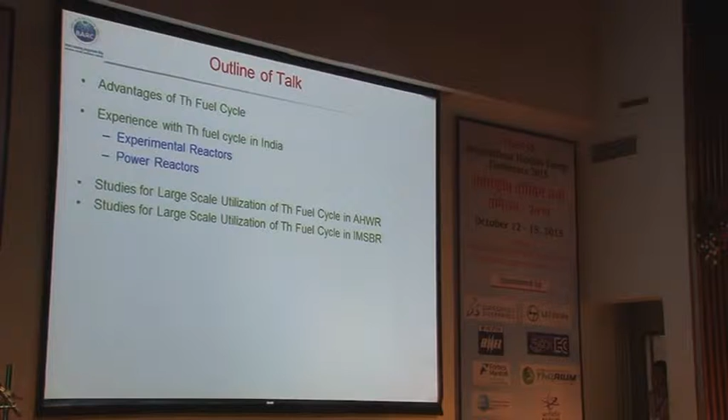I will be giving the work being done in RPDD regarding the development of advanced heavy water reactor, and some flashes of MSBR. The outline of my talk: first I will give some advantages not spoken of in this conference, then experience with thorium fuel cycle - this has been dealt by Dr. Vijayan at length, so I may skip this - and then studies for large scale utilization of thorium fuel cycle in AHWR, followed by Indian MSBR.

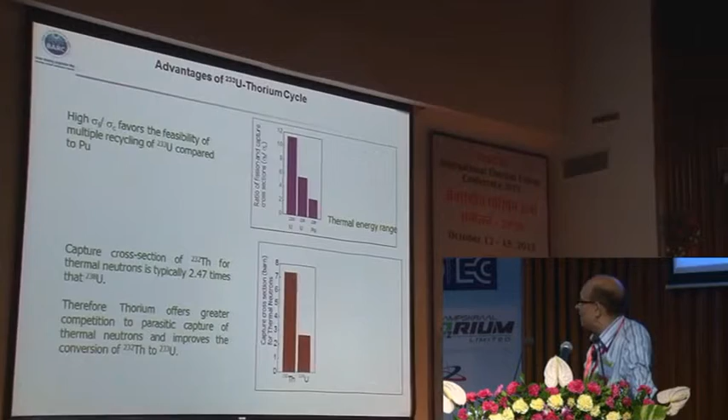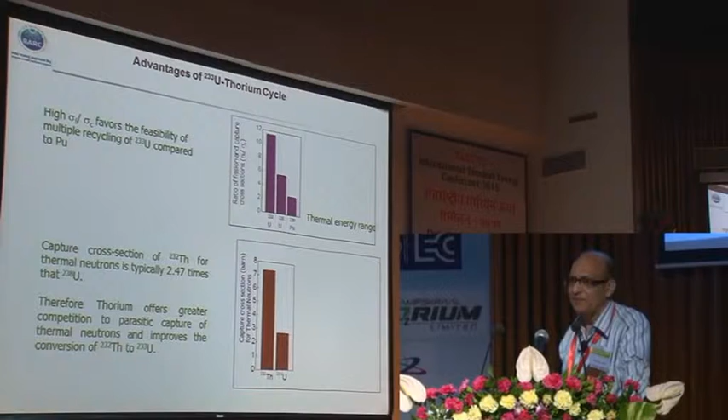As you know, one important thing is the sigma fission to sigma capture cross section of uranium-233 in the thermal energy range, which is highest for uranium-233 compared to others. That means more and more multiple recycling can be done with uranium-233. This is one of the important aspects for the development of this fuel cycle.

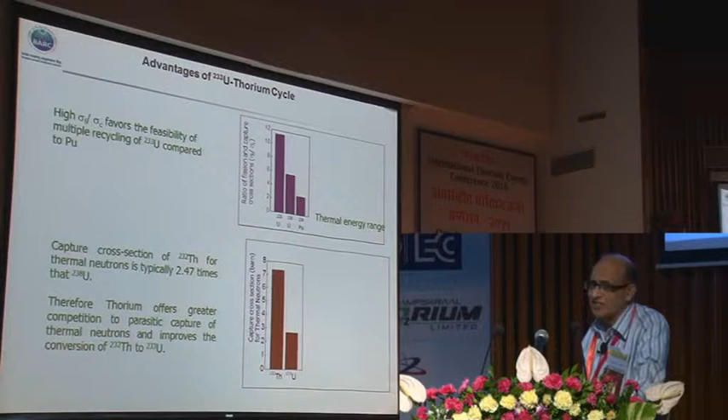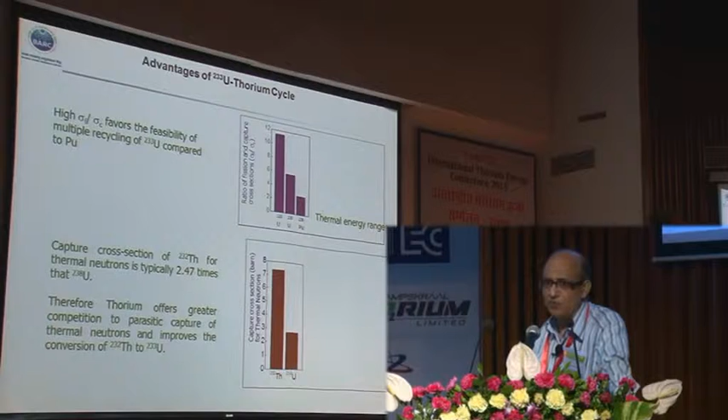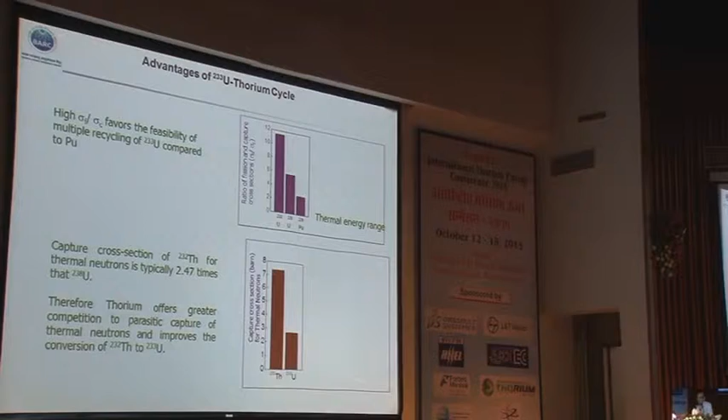Another aspect is the capture cross section of thorium is roughly 2.5 times that of uranium-238. That means in order to compensate the higher absorption in thorium, the enrichment has to be much more. Further, if you want to really take advantage of thorium cycle, the burn-up also has to be large, which further calls for higher enrichment. That means the total absorption cross-section of the thorium fuel is much more. Because of this, it offers very good competition to other structural materials - you can afford to use, say, light water as a coolant. That is why in AHWR, a light water coolant has been considered.

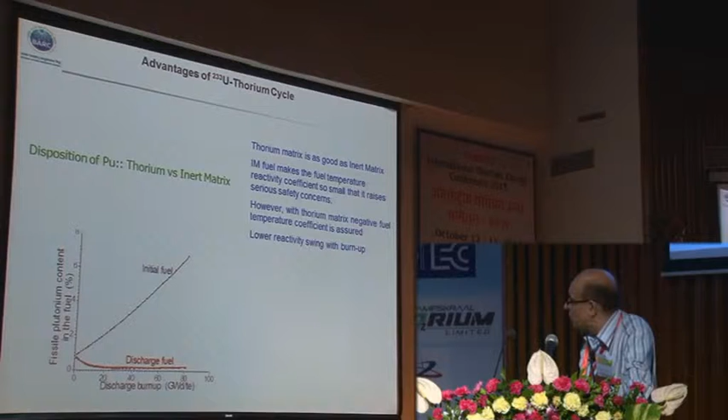Another advantage of thorium, which is of course known, is that it offers a very good material for the disposal of plutonium. It is as good as inert matrix, but one of the advantages is that the reactivity coefficients are negative with this compared to inert matrix. So this material is better than inert matrix.

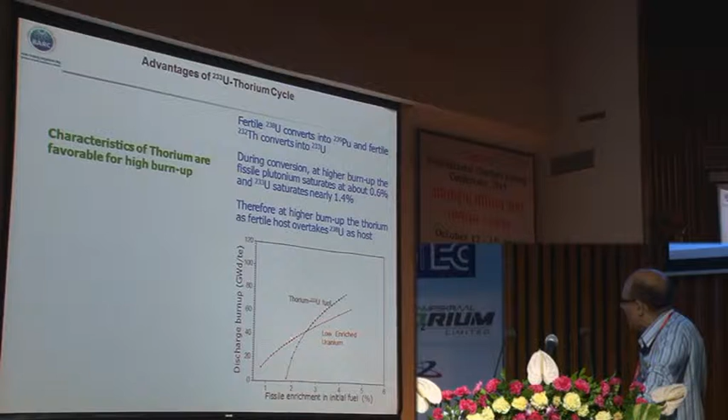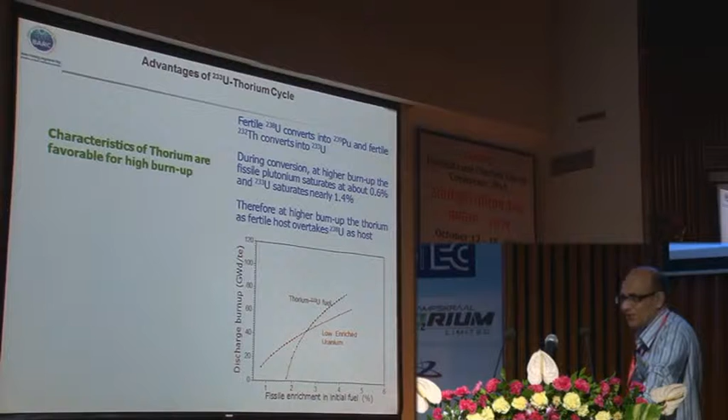If you are using thorium in once-through mode, because uranium-233 production requires a higher amount of fissile material, in order to get the maximum benefit you need higher burn-up. Fortunately, it is seen that in a typical PHWR, for low discharge burn-up the normal uranium cycle is better, whereas at higher burn-up - say more than 40,000 or 45,000 megawatt day per ton - thorium offers advantage. So you have to use higher burn-up if you want to use thorium.

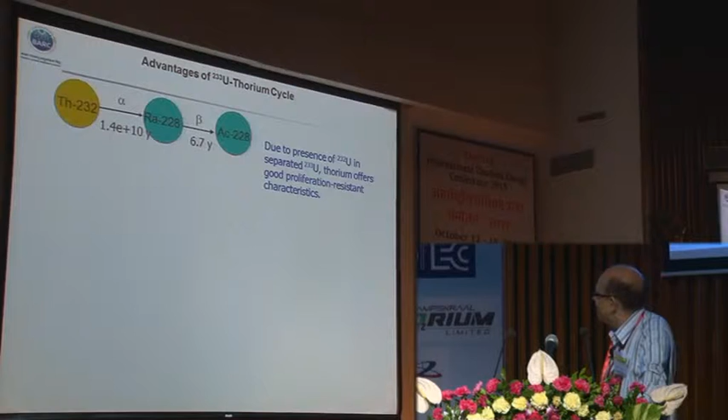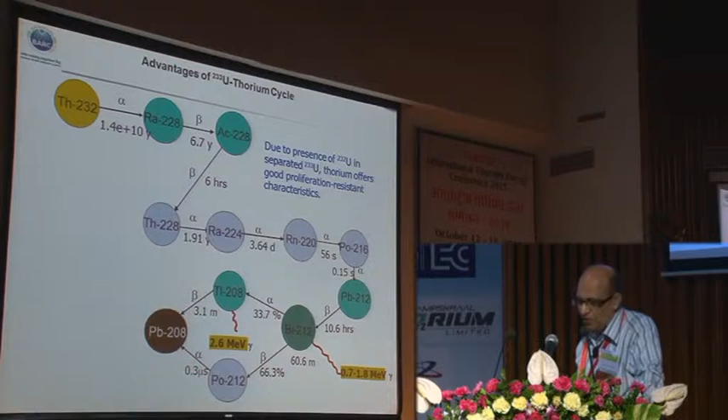Anyway, it is known that there are certain elements which give hard gamma rays. This can give rise to high proliferation resistance of this fuel cycle.

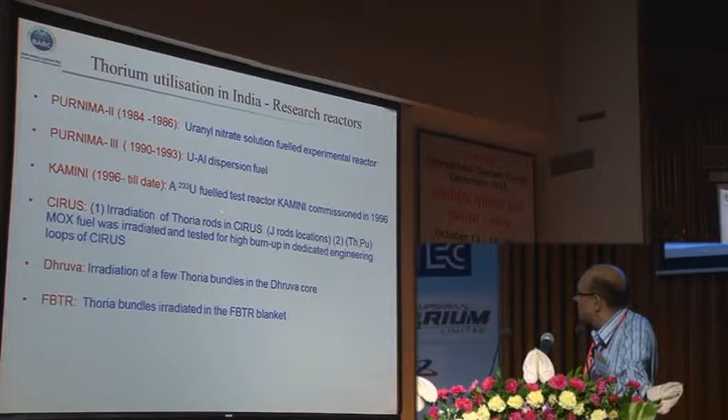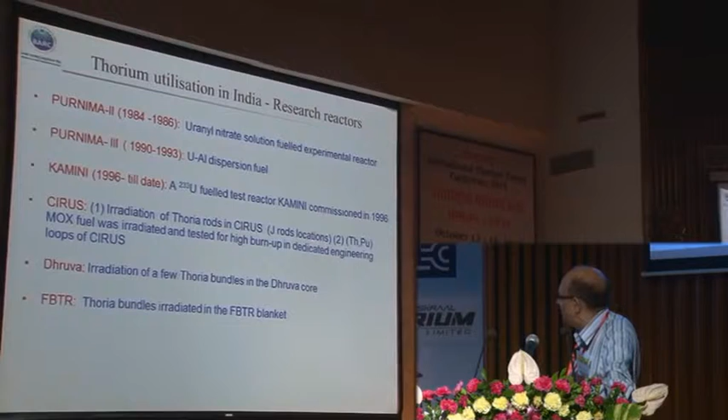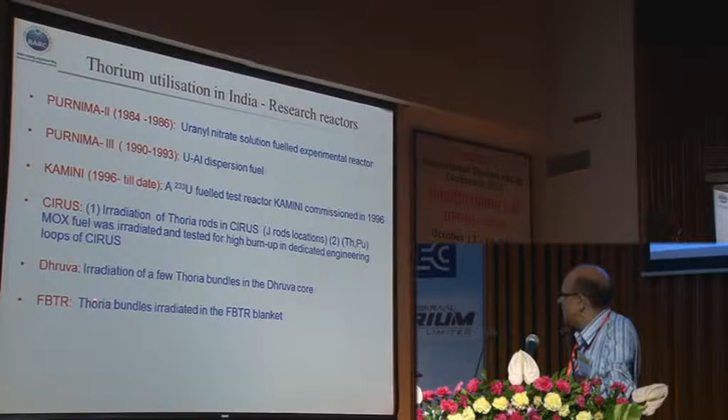Thorium has been used in a number of research reactors, including Purnima 2, where certain experiments were performed with uranyl nitrate solution, followed by Purnima 3, where experiments were done with uranium aluminum dispersion, prior to using this fuel in the Kamini reactor at Kalpakkam. This is the only reactor operating in the world with uranium-233 fuel. Certain irradiation has also been done in CIRUS, particularly with pure thorium rods as well as thorium-plutonium MOX fuel. Some irradiation has been performed in the Dhruva reactor, and finally in FBTR, as you heard this morning, where a lot of irradiations are being done.

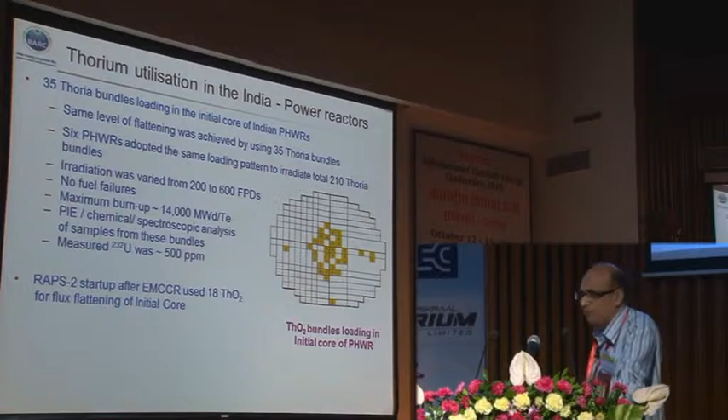As far as thorium utilization in a power reactor is concerned, the first time thorium was used in a unique manner was because when starting the PHWR core, the power distribution is very peaked, whereas the equilibrium power distribution is relatively flat. If you want to obtain higher power from the beginning, you have to achieve some power flattening. This can be done using either depleted uranium or thorium. We were the first country to use thorium for this purpose, and by using only 35 fuel assemblies of thorium, a very good power distribution was obtained, making it possible to get almost more than 95% of the power from the very beginning itself.

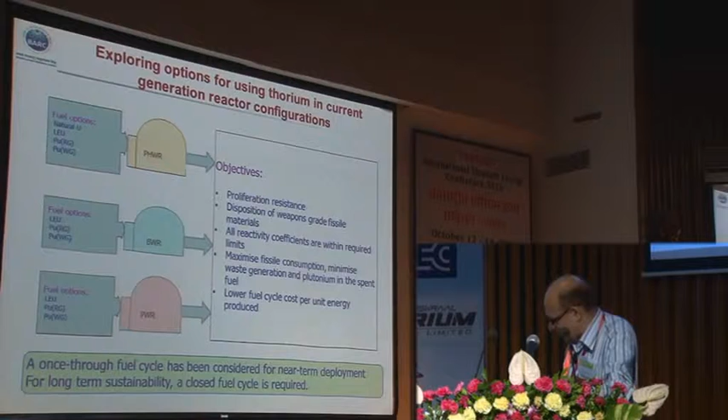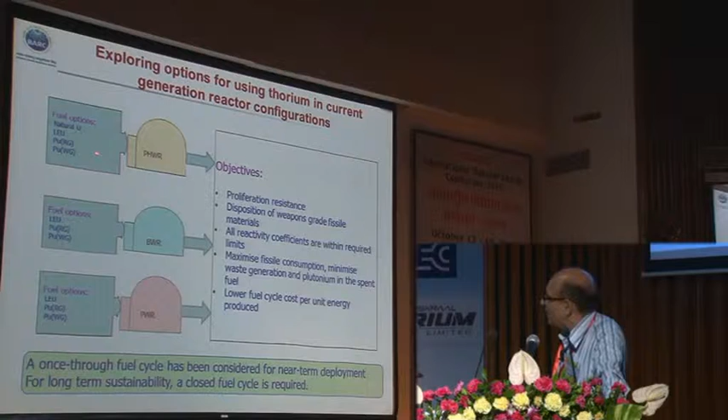Apart from this, a lot of studies have been conducted to use the thorium fuel cycle, for example in PHWR, BWR, and PWR. The fuel consisted of thorium-LEU, then plutonium-thorium mixed oxide, considering plutonium of both reactor grade and weapons grade. The aim with plutonium-thorium was plutonium disposition, whereas the aim of the thorium-LEU fuel cycle was basically proliferation resistance - that was the main aim.

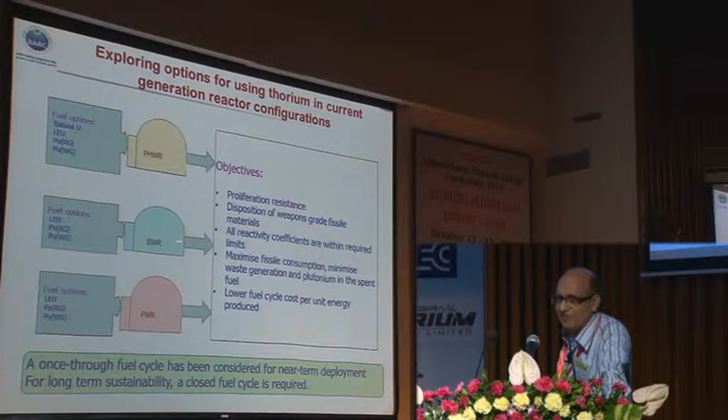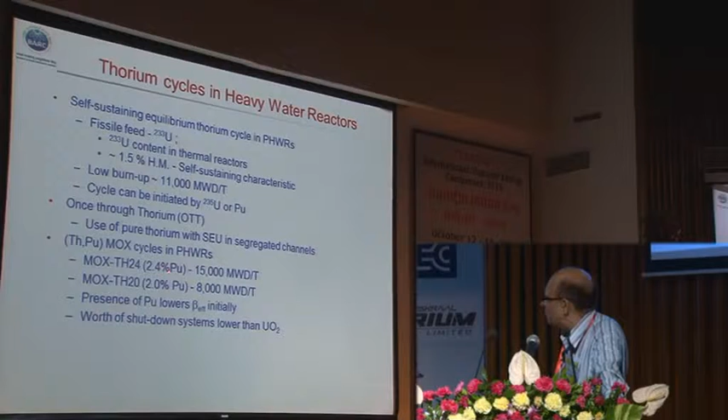Other studies have been conducted. For example, self-sustaining equilibrium thorium cycle in PHWRs have been studied. Then once-through thorium cycle has been studied. Other use of thorium-plutonium MOX cycles in PHWR have been studied using 2.4% plutonium as well as 2% plutonium. These are certain studies which have been done.

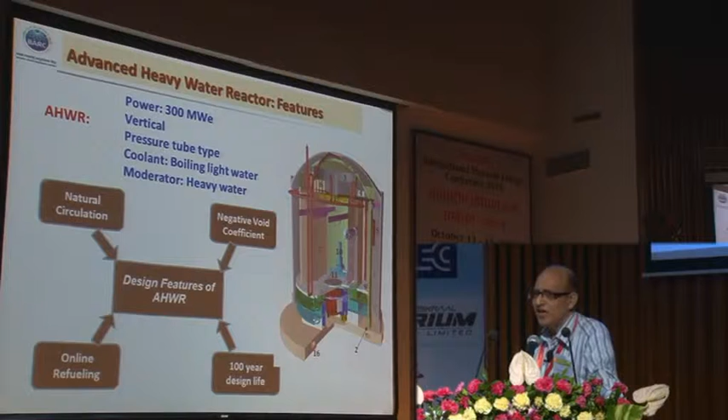For existing reactors. Now I will come to today's main talk, which is the advanced heavy water reactor. The main aim of the advanced heavy water reactor is to test all the thorium technologies on the industrial scale, plus we had to also see the other safety systems which will be used in the third and fourth generation of reactors.

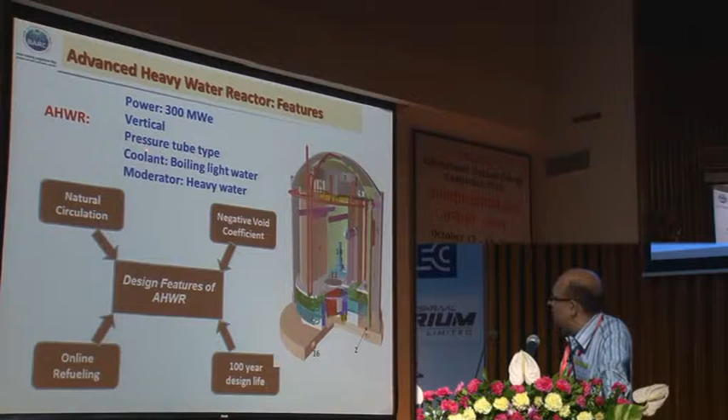This is the main objective, and the advanced heavy water reactor is a 300 megawatt electric vertical reactor having pressure tube type. Coolant is boiling light water reactor. Moderator is heavy water. If you observe, it marries all the good properties of PHWR as well as BWR, so it marries both the better qualities of light water as well as heavy water reactors.

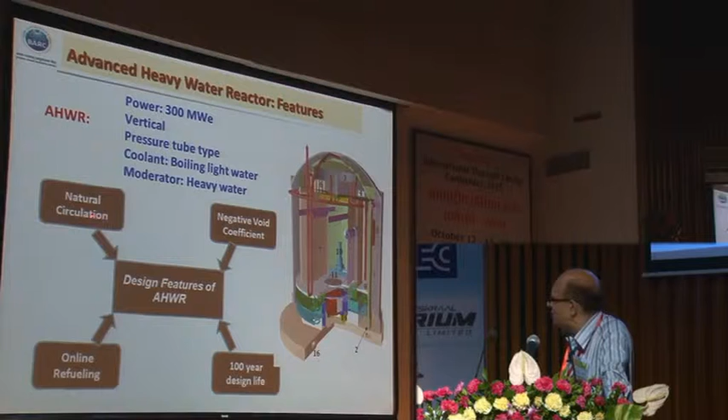And the main features are: it uses natural circulation for the coolant, it has negative void coefficient in all the burn-up range, lifetime is 100 years design life, plus there is online refueling in this.

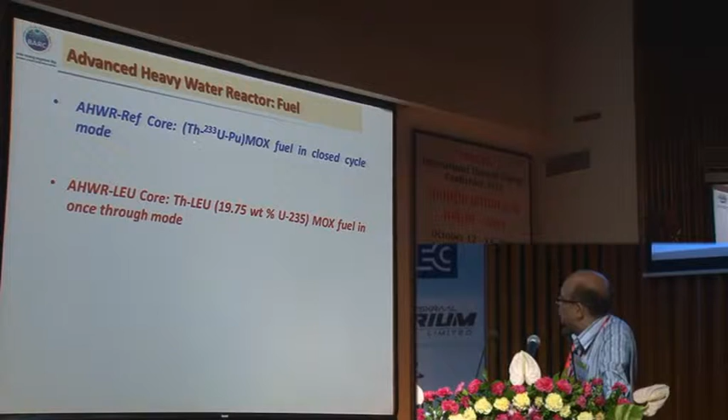Actually, two fuel cycles are being considered. One is thorium uranium-233 PU MOX fuel in closed cycle mode. This will be termed as AHWR reference core. In another mode, thorium LEU MOX fuel will be used, and LEU will consist of 19.75% uranium-235. This is in the once-through mode. These are the two fuel cycles being considered.

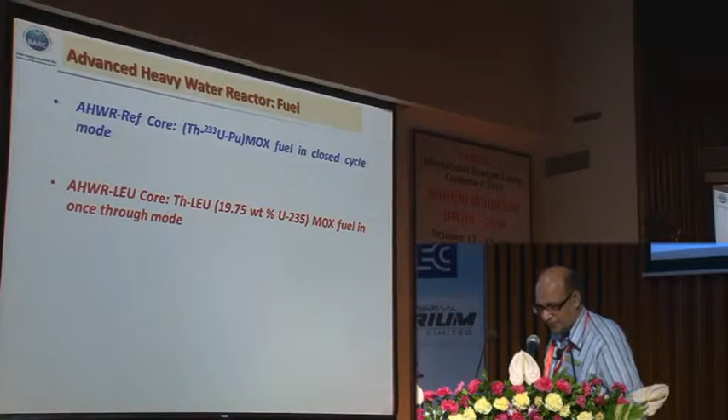This advanced heavy water reactor has many passive features like core cooling by natural circulation, negative void coefficient of reactivity, large heat sink as gravity-driven water pool, passive core decay heat removal, passive containment cooling, emergency core cooling injection in the fuel, core submergence, double containment.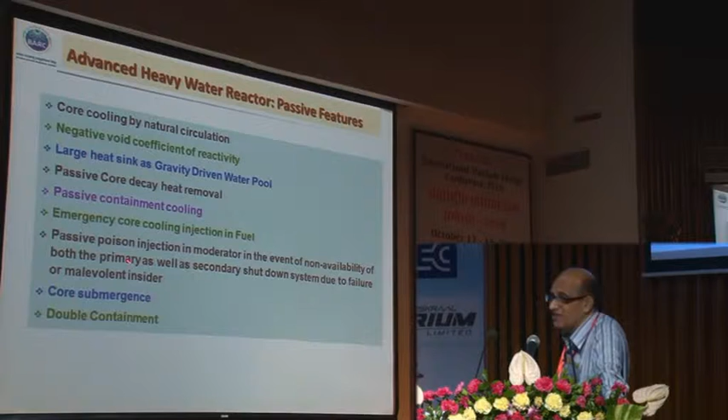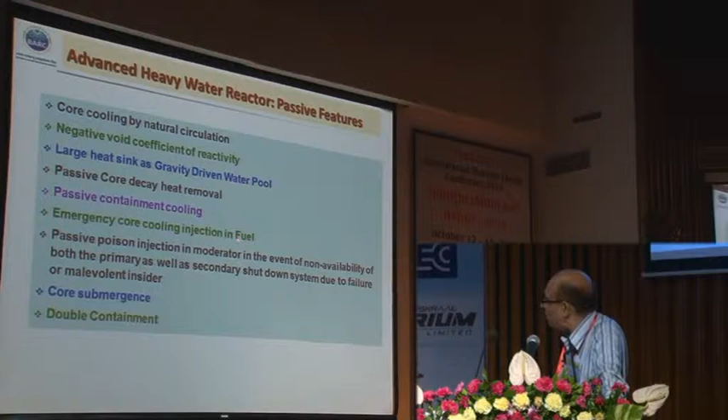Plus one more feature it has, that is passive poison injection in the moderator. This can be used in the event of non-availability of both primary as well as secondary shutdown system, or due to malevolent insider threat. To tackle both these things, this passive system can be used.

Now I will describe one by one both AHWR reference core as well as AHWR LEU core. Actually, for starting any PHWR, the initial core has to be slightly different, because otherwise if we use the equilibrium fuel cycle from the very beginning, the core is so reactive you may have to use a lot of poison, and it may lead to positive coolant temperature coefficient, etc. To tackle this problem, the core has to be slightly less reactive.

So initial core has to be different from the equilibrium core. For example, in AHWR reference core, initial fuel consists of DU-PU MOX fuel. To start with this fuel, we can go to a transition fuel, because the equilibrium core uses thorium, plutonium, uranium-233 MOX fuel. Suppose uranium-233 is not available, we have to generate it in situ. So there is a transition fuel cluster, Th-PU MOX. This will be used for transition purpose, and we will get uranium-233 from this, which will subsequently be used in the equilibrium core cluster after a couple of years.

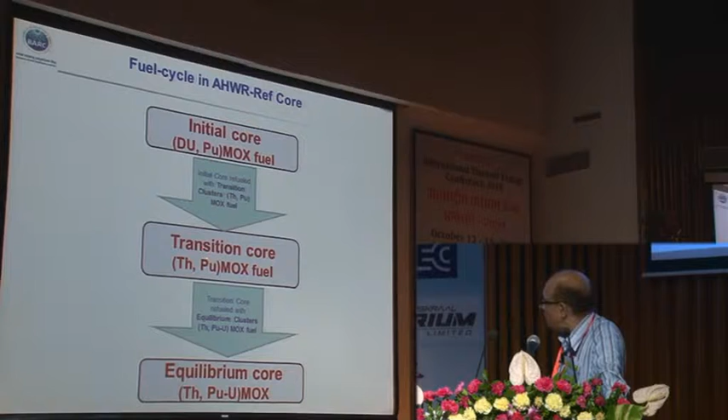This transition may take 15 years or so. In case uranium-233 is available in the very beginning, then this transition period can be 0 years. That is, if sufficient amount of uranium-233 is available in the beginning, we can directly come from initial core to the equilibrium core, or it may take at the most, say, 15 years of time.

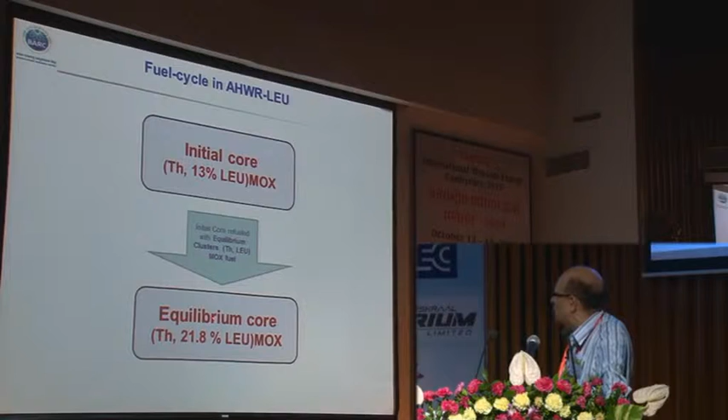Whereas in the fuel cycle in the AHWR LEU, initial core consists of thorium, 13% LEU MOX, and finally we refuel with equilibrium fuel cluster, and directly it comes to the equilibrium fuel cluster after some time.

So what is the fuel of these two? As I told you, initial fuel cluster may be slightly different. I will not describe much about that. I will directly describe the characteristic of the equilibrium core, because that is what will determine this. So even though we have studied the transition from initial core to equilibrium core, today I will only give the equilibrium core characteristics.

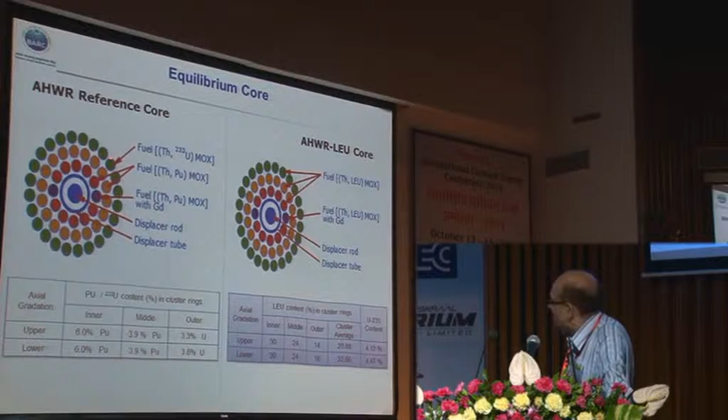So AHWR reference core, as well as AHWR LEU core, both use a 54 rod cluster. In the reference core, the first two rings have thorium, plutonium MOX, whereas the third row, the outermost ring, uses thorium, uranium-233 MOX. And in the last pin, the fuel is graded axially: the outermost ring, for example, contains 3.3% uranium in the upper half, whereas 3.8% uranium in the lower half, to achieve bottom peaking, which is better from thermal hydraulic considerations.

In AHWR LEU core, it is only thorium LEU fuel. For example, the first two rings have 30% and 24% LEU in thorium, whereas the outermost ring is graded: the upper half has 14% and the lower half has 18% LEU in thorium.

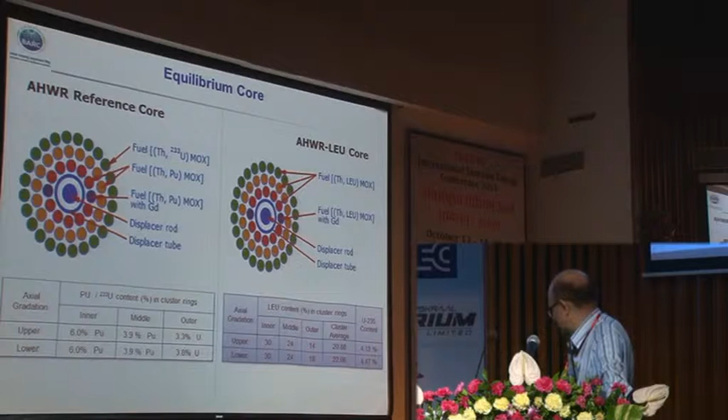So basically, as far as reactor, both the reactors are same. Power is 300 megawatt electric. Main difference is thorium uranium MOX plus thorium plutonium MOX fuel in AHWR reference core, whereas here thorium LEU fuel.

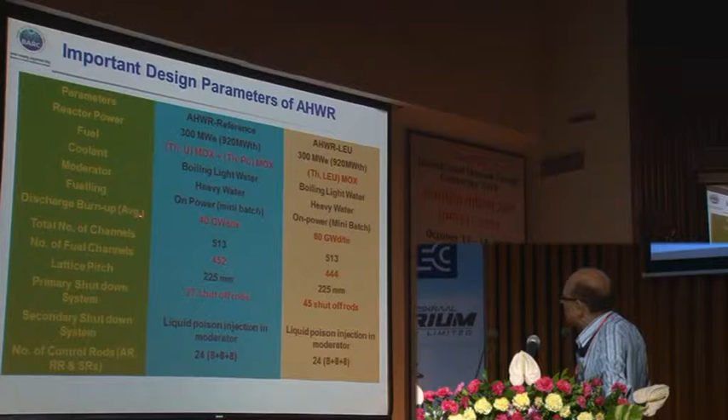According to this, the discharge burn up in this is 40 gigawatt day per ton and 60 gigawatt day per ton for the thorium LEU.

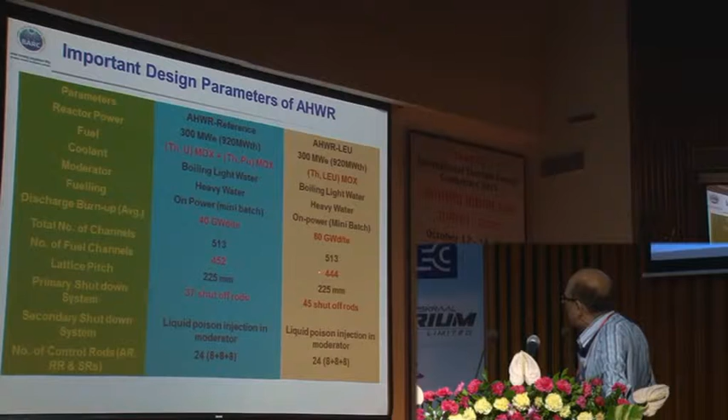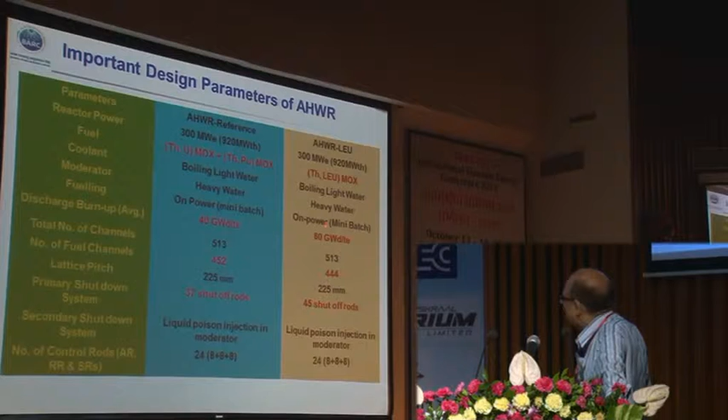Other small difference between these two reactors is there are number of fuel channels in this, 452. Here 8 channels have been reduced because there was more need for the shut-off rods. So accordingly, there are 37 shut-off rods and 45 shut-off rods in this. So these are the major differences between these two designs. Otherwise, they are of similar type.

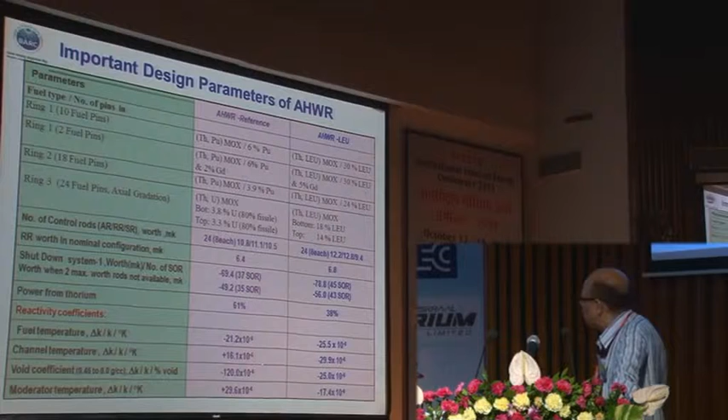So basically, if we see, most important thing about this is the differences in the reactivity coefficients. If you see the reactivity coefficients in the AHWR reference core, the channel temperature coefficient as well as moderator temperature coefficient, they are positive. And this can be handled very easily because the total change in temperature for this is very small and it introduces hardly very small reactivity, and this is being handled very efficiently in the present PHWR.

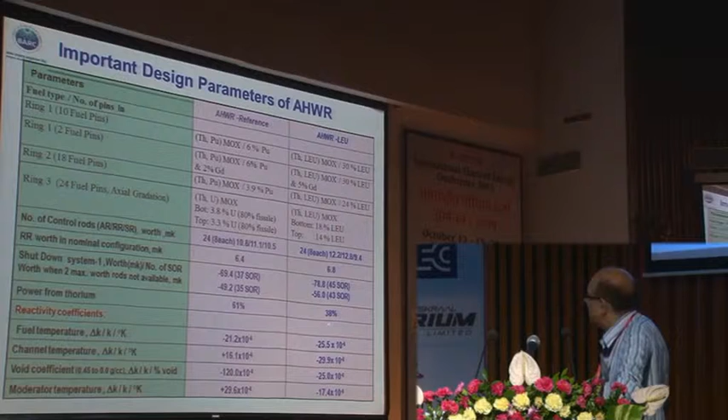However, in AHWR LEU case, all the reactivity coefficients are negative. So in this respect, AHWR LEU scores higher.

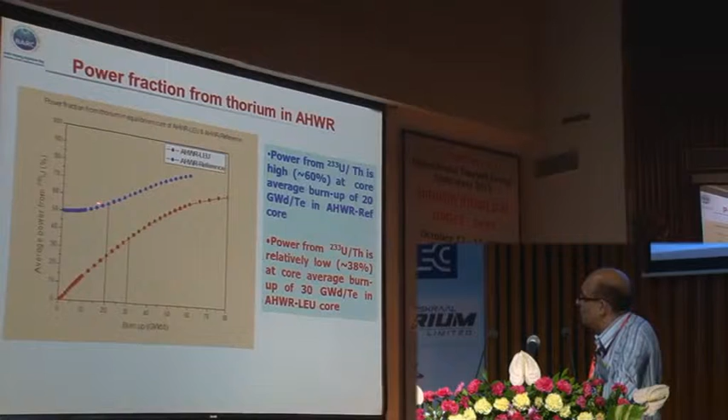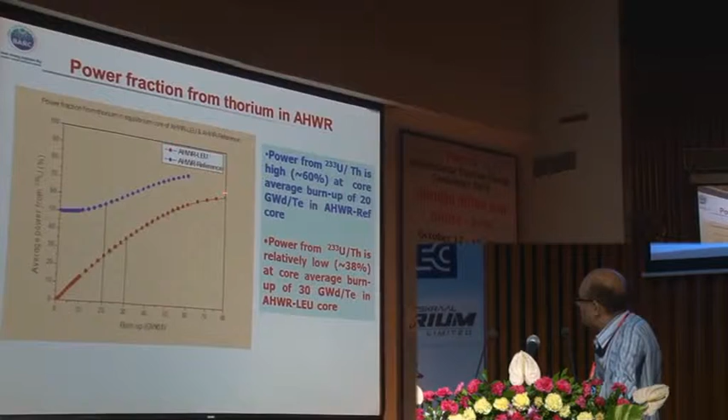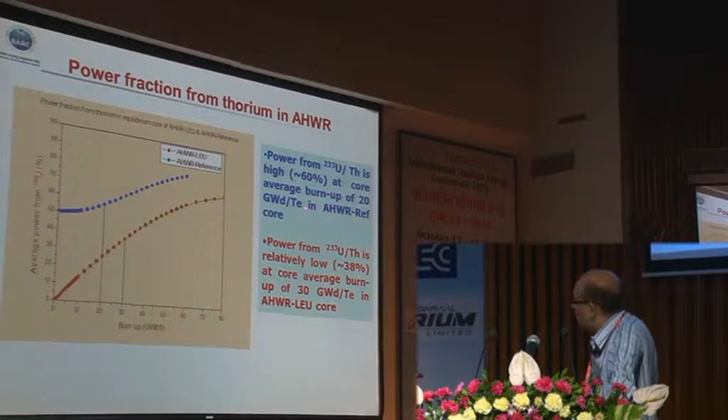This gives how much power is generated from the thorium uranium 233. So from this it can be seen that power fraction coming from thorium uranium 233 is 60% in the case of AHWR reference core, whereas 38% it comes from the thorium LEU core, AHWR LEU core. So this is the only reactor design where such a high power fraction comes from thorium uranium. None of the other designs in the world uses this much power from the thorium uranium 233.

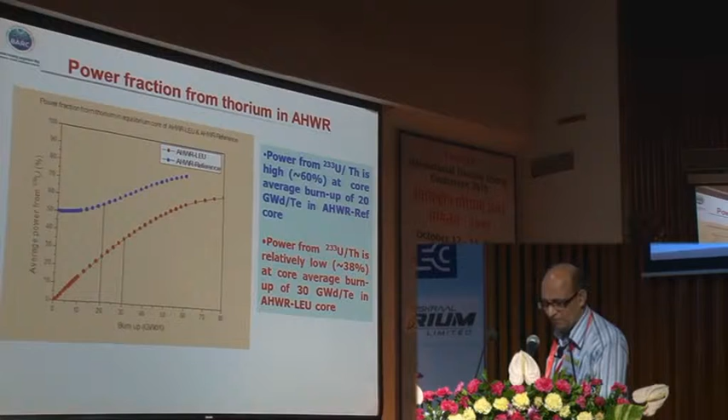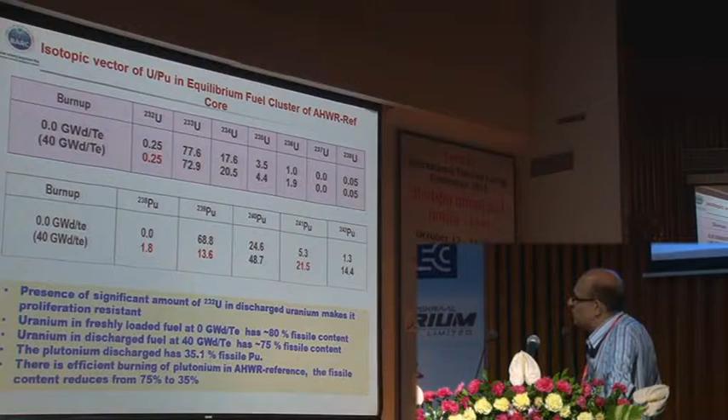Thus, this reactor really acts as a very good burner of the plutonium. Starting is 75%, whereas when it is discharged, it has only 35% of the fissile PU.

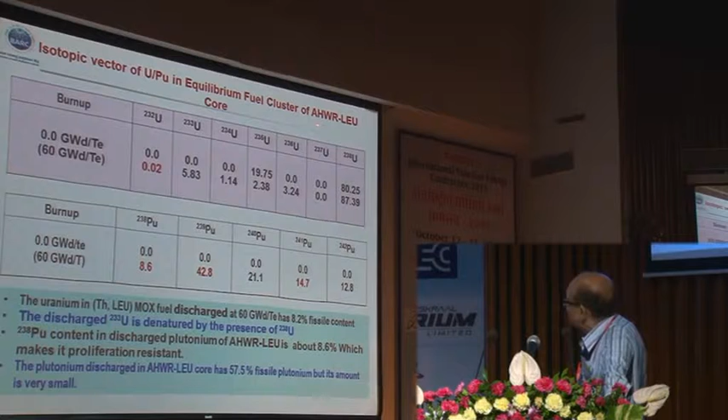If we see the similar characteristics for the AHWR LEU core, of course here it has uranium 232 as 200 ppm or so, but it has very high percentage of plutonium 238, and it is as high as 8.6%. So this really acts as a highly proliferation resistant fuel as far as this core is concerned.

Another thing is the discharge uranium contains about 8.2% of the fissile, 5.83 uranium 233 plus about 2.38% uranium 235. So this fuel, if a decision is taken, can be reused in other reactors. Overall, the plutonium discharge has very poor quality, 57.5% plutonium, but because the core contains only 20% uranium 238, hardly, so plutonium production is very, very small.

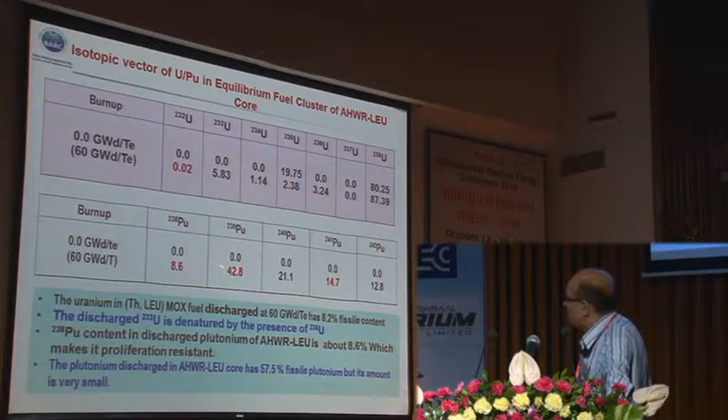So as far as proliferation resistant characteristics of this core are concerned, they are very superior, and this is being proposed in the export model, that this fuel should be used. Actually, former chairman Anil Kakodkar on his first day actually proposed a reactor for PHWR also on similar lines.

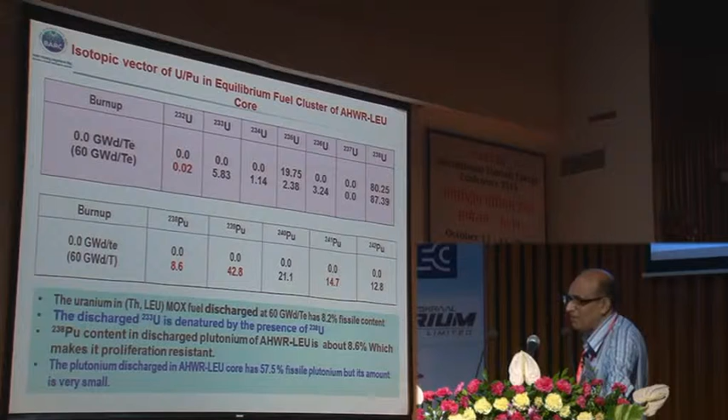Let us see the fuel economics actually. In the AHWR reference core, annual requirement of uranium is 90 kg, and it is self-sustaining. Actually, the reactor itself gives more than what comes in. Uranium coming out is 110 kg, so it can be comfortably managed.

Whereas the annual requirement of plutonium is 150 kg. So even if we do not consider whatever plutonium is coming out, if you see that actually for 1 megawatt electric of PHWR, whatever plutonium it gives, the same plutonium can be used for the AHWR reference core. That means, from a fuel utilization point of view, 1 ton of natural uranium, whatever plutonium it gives in the PHWR, same plutonium can be used to run this AHWR reference core only.

And whereas for AHWR LEU core, annual requirement of LEU is 760 kg. Another good point about this core is minor actinide discharge annually in AHWR LEU core is very, very small, only 2.4 kg.

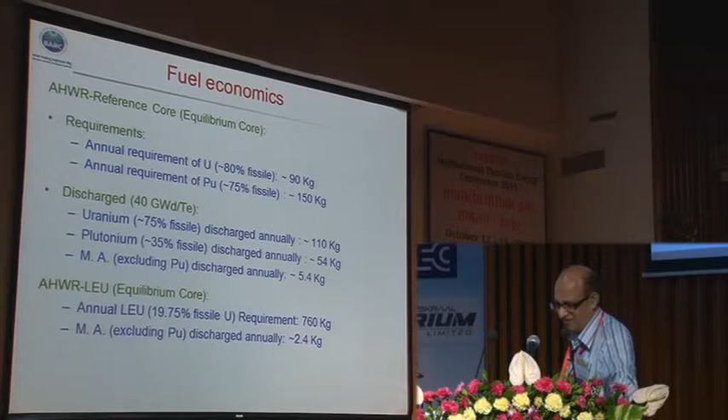So just summarizing, the AHWR reference design is very good, the fuel requirement is less, and power from thorium is very large. In a nutshell, we can say this.

For the AHWR LEU design, LEU has been found to be a very good external feed for thorium oxide. LEU content is only 21.7%, equivalent to about 4% to 4.2% of uranium-235, and this gives 60 gigawatt-day per ton of burnup.

Fissile uranium requirement per unit energy is significantly lower. About 38% of power comes from uranium-233 from thorium. The uranium in the discharge fuel has 8.4% fissile content, which can be used in other reactors.

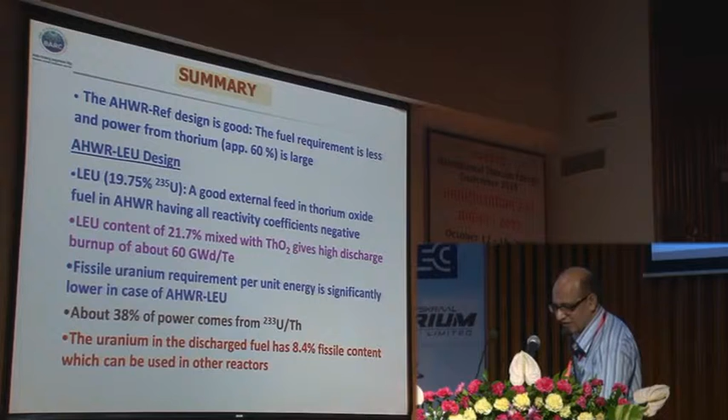The discharged uranium is denatured and contains significant amount of uranium-232, so it cannot be used easily. As far as proliferation resistant characteristics are concerned, they are very good.

Further, the discharged plutonium has only 57% fissile content, and that too contains 8.5% of plutonium-238. Plutonium produced per unit energy is much less in the case of AHWR LEU, because 80% contains thorium.

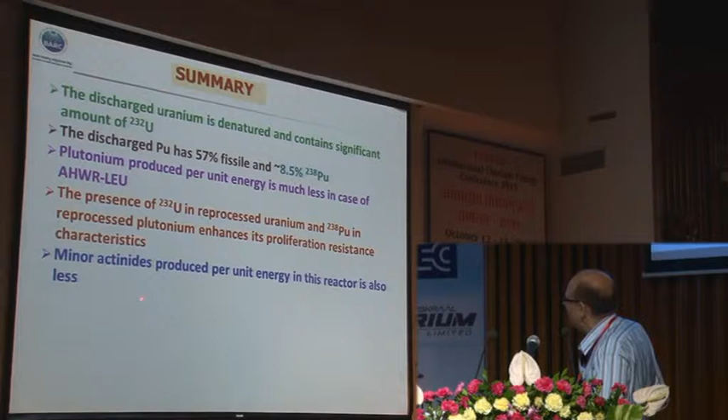The presence of uranium-232 in the reprocessed uranium and plutonium-238 in reprocessed plutonium enhances its proliferation resistance characteristics. Minor actinide production per unit energy in this reactor is also very low.

So this is what I wanted to talk about regarding AHWR. Now I will give briefly, in about 5 minutes, an overview of the molten salt breeder reactor. At present we have just started working on this system, so these are very preliminary findings.

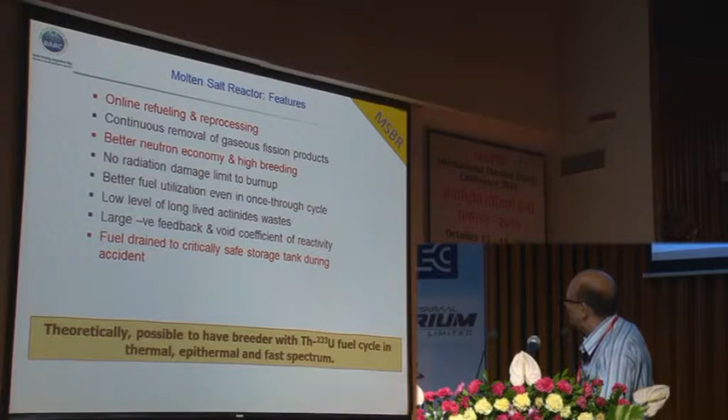Quickly, one of the important things about the molten salt reactor is that online refueling and reprocessing is possible. It offers better neutron economy because of these features, and fuel can be drained to a critically safe storage tank. These are the important features which are further drivers, apart from many other advantages it offers.

Presently, thermal, epithermal and fast systems are being considered for uranium-233. In all respects - breeding ratio, moderator lifetime, feedback coefficient - from all these considerations, the fast reactor scores higher.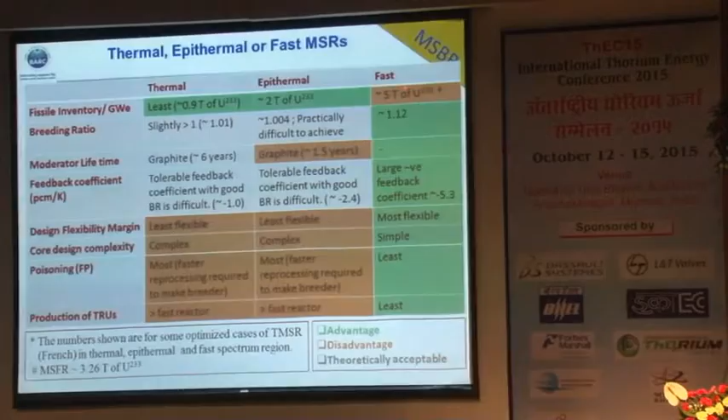The only difficulty with the fast system is that it requires fissile inventory per gigawatt electric that may be very high, of the order of 5 tons at least. So this is the only negative point about the fast reactor. Otherwise, in all other respects, this is superior to the thermal spectrum or epithermal spectrum.

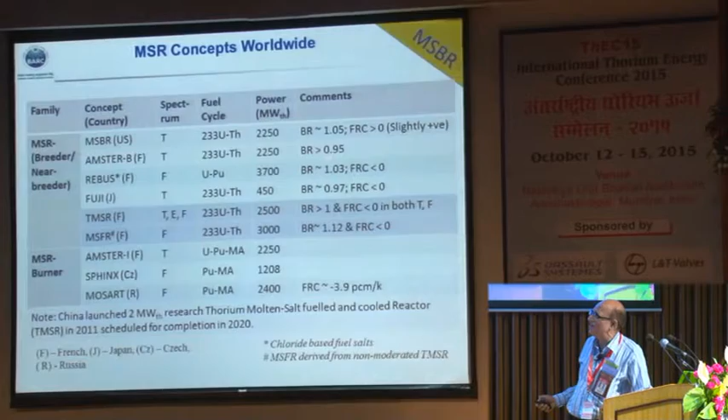Looking at this, there are certain MSR concepts being followed worldwide. I want to say that wherever the thermal system is used, the breeding ratio varies around 1, from say 0.95 to 1.07 or so. So it is acting more as a converter rather than a breeder.

Whereas if you want to use it as a breeder, it has to be used in the fast spectrum, where it can be of the order of 1.12 or so. So looking at this, we started working on the fast MSBR concept, and we are right now considering both loop type option as well as pool type option.

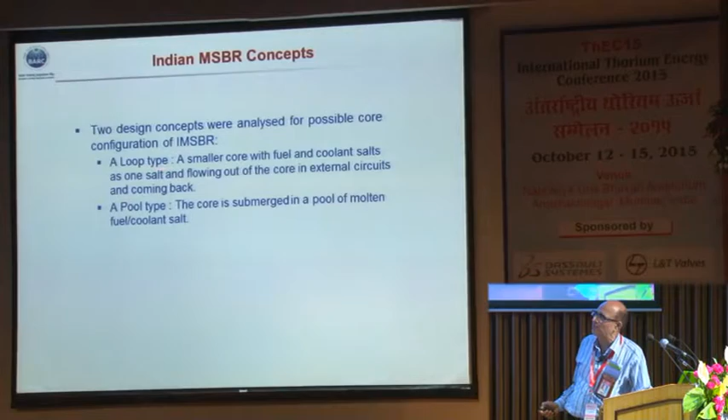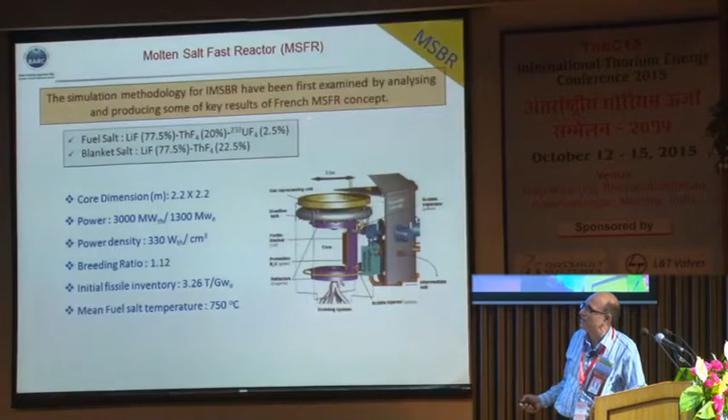Before proceeding, since our codes are normally tuned for the thermal range, we wanted to first check our modeling for this system. So first we analyzed the MSFR, the French molten salt fast reactor. We obtained a breeding ratio of the order of 1.17, initial fissile inventory of 3.2 tons per gigawatt electric, and the spectrum obtained was very similar to the one given by them.

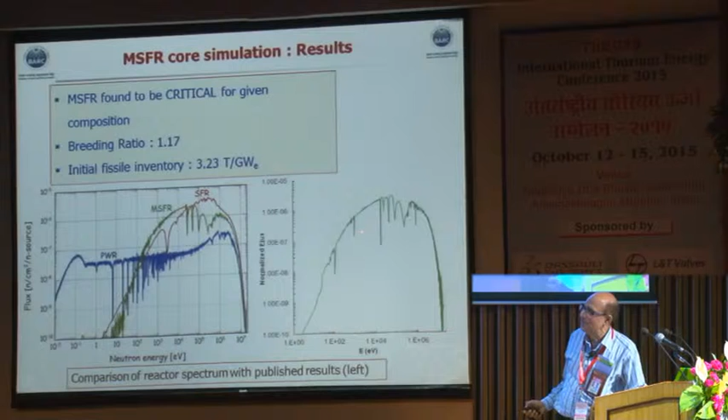This establishes that the calculating power we have can be easily used for this type of system. Then we looked at a number of MSR concepts, for example loop type design. The fuel being considered for this is lithium fluoride, thorium fluoride, and uranium fluoride, with uranium fluoride concentration changing from say 2.5% to 3%.

It has been seen that 2.7% may give the required results, where the initial conversion ratio - what we are talking about is not equilibrium cycle, but only initial - is of the order of a breeding ratio of 1.09. So this is one option under consideration right now.

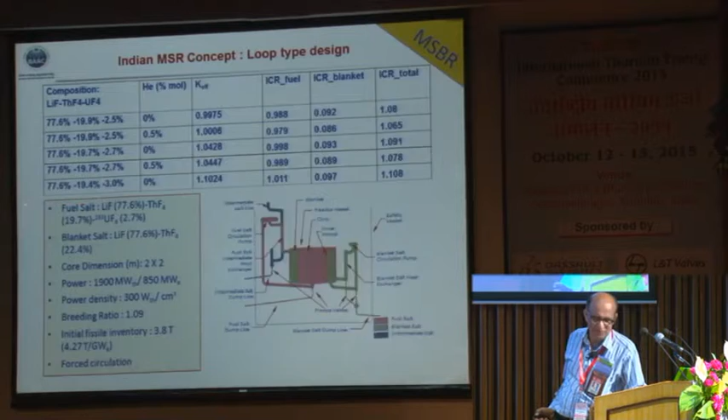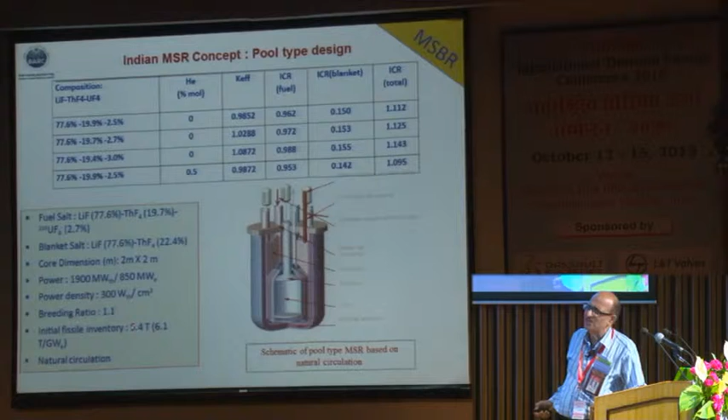Another option is the pool type, basically the same, only difference being that the whole reactor is submerged in the pool. So initial fissile inventory is very high; otherwise the same 2.7% uranium fluoride will be enough, and it gives a breeding ratio of the order of 1.1. So both options are under consideration.

Then safety studies need to be done for the recirculating fuel, because as fuel goes outside, some of the delayed neutrons come out. Because of this, the effective delayed neutron fraction in the core is smaller, and depending upon the speed of the flow, the delayed neutron fraction can be as low as 300 pcm compared to 700 pcm - that is hardly 3 milli-K compared to 7 milli-K.

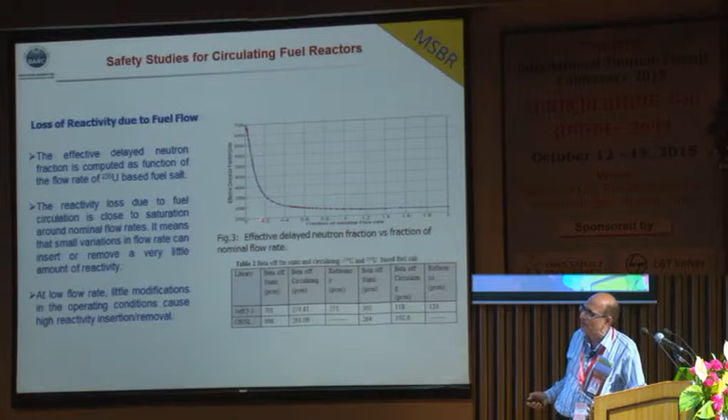So we are actually sharpening all the tools required for this, and it has been seen that compared to other calculations, our calculations are matching well.

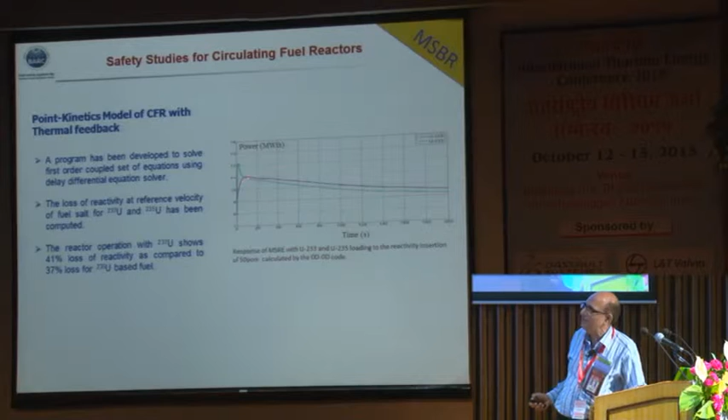Then, of course, another program for the safety study - we are continuing the safety study and trying to develop a point kinetic code for the delay differential equation solver. We are trying to solve this for the circulating type of reactor. Preliminary results which we have got are very encouraging.

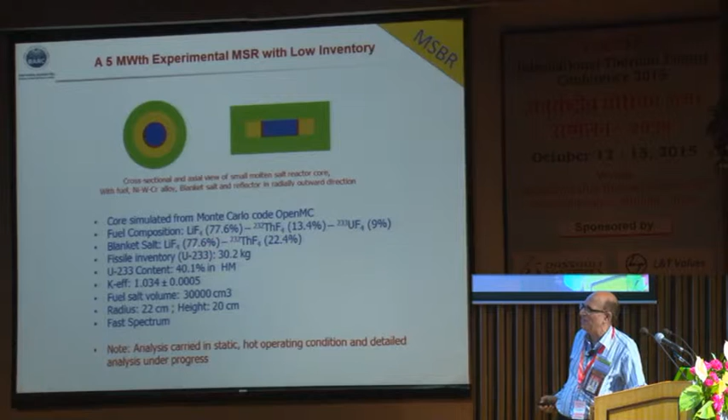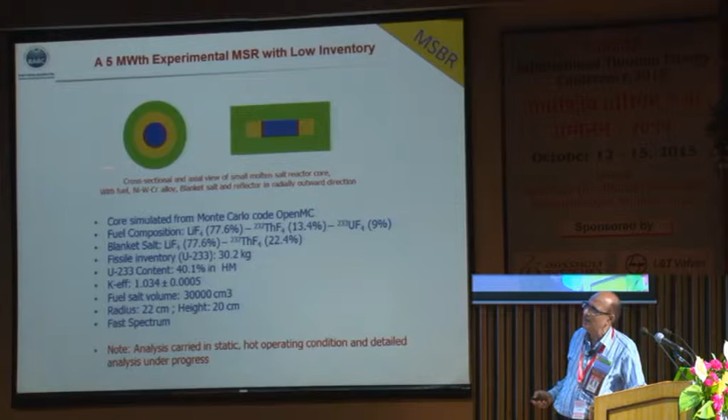Finally, we are trying to design a 5 megawatt thermal experimental MSR facility. Right now we are working on this. The initial fissile inventory for this 5 megawatt thermal reactor will be of the order of 30 kg or so, and the total requirement may come out to be 50 kg if we take into account refueling for a couple of years.

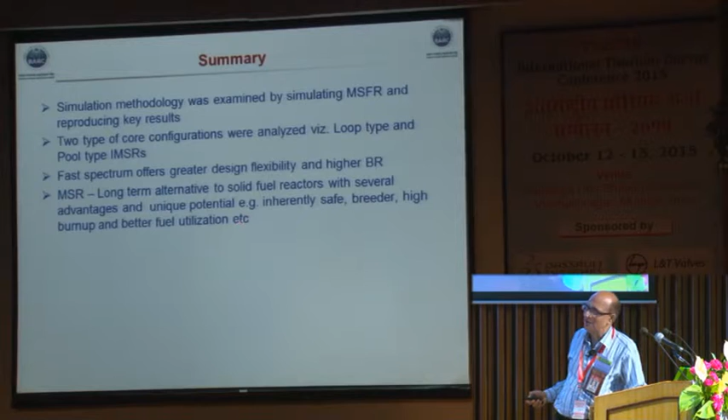Summarizing the things - simulation methodology has been examined by simulating MSFR for reproducing key results. Two types of core configurations are being considered, loop type as well as pool type. Fast spectrum offers greater design flexibility and higher breeding ratio. MSR is a long-term alternative to solid fuel reactors with several advantages and unique potential - for example, inherently safe, breeder, high burn-up, and better fuel utilization. With this, I thank you for your kind attention.